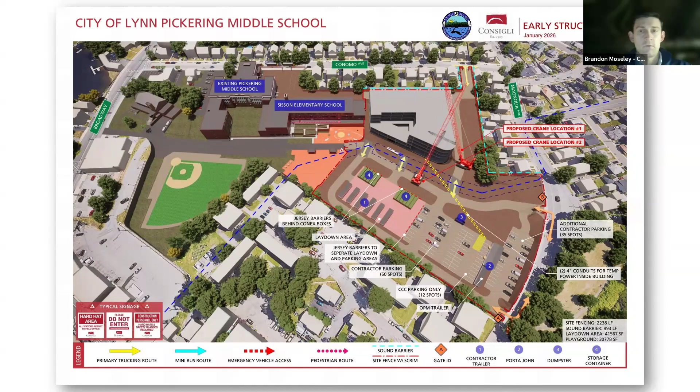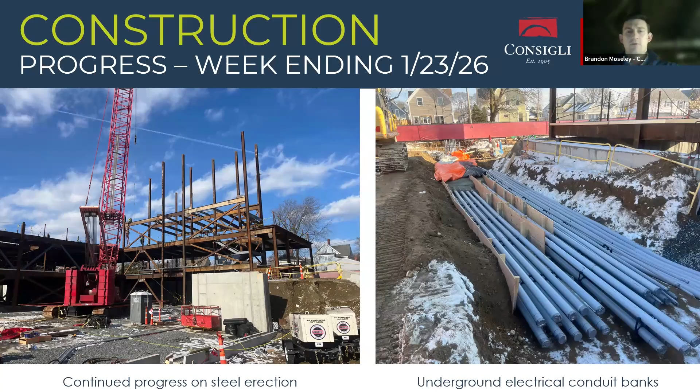On the right is a shot of our duct bank. While we've worked on the structure, we've continued with what we need to on the site. This was showing some of the secondaries coming in from that transformer location towards the building, and it actually takes another sweep through the foundation wall and into the area right beneath our electrical room to tie into all that equipment. There's another photo showing that progress further, but we've since been able to place that concrete, which is great.

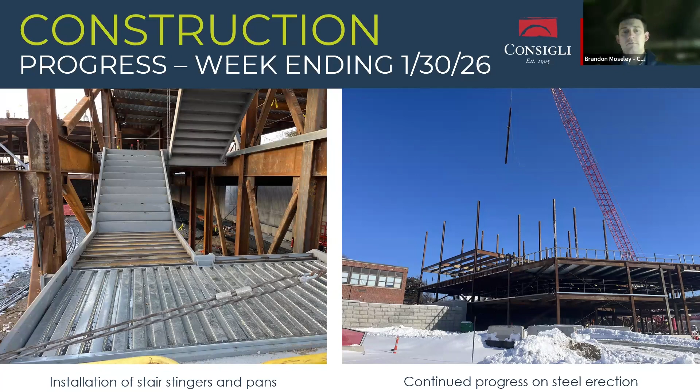The shot on the left here is the stairs that have been going in. A strategy Consigli uses as a whole when we can is to get the stairs in with our structural steel. It provides a much safer means of access for everyone working from now on. We're going to temp in these stairs with handrails, make them safe, and that will always be safe permanent access, nothing temporary goes in. So it's a budget plus as well as a safety plus for everyone on the site. On the right is a continued shot of the steel erection, a column being flown up onto the fourth floor, more towards the northwest side of that site.

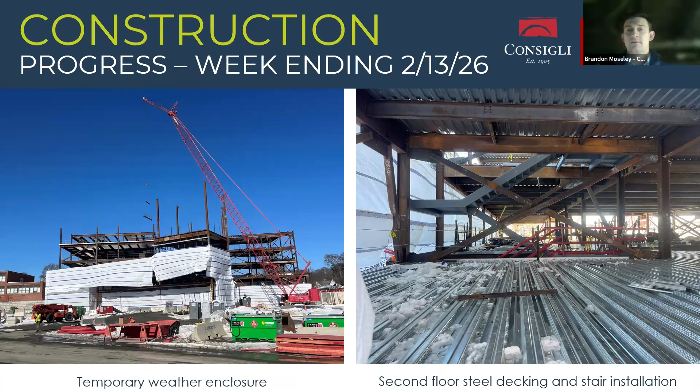So we're going to talk about some key milestone dates, but we're working right up against our goal of hitting our first slab placement, which is great, a little ahead of our milestone date. On the right here is a look of the level 2 slab. See some of the snow we've battled, as everyone else has here, right?

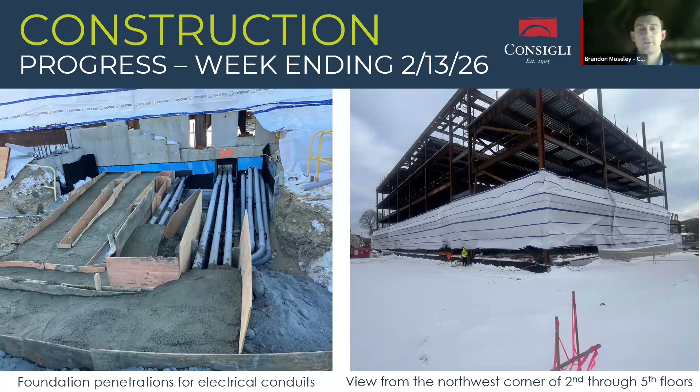But like I said, we've since been able to progress through that and even do some concrete placements to get that closer to being done. On the right is a shot from the northwest corner, just kind of showing that elevation progress of the structural steel, and then the tarping that's been tightened up on that corner as well.

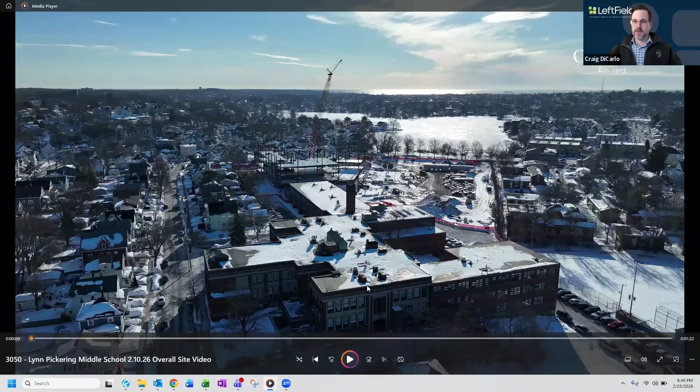All right, does everyone have that video up? Looks like it. Yes. So this is kind of flying in from the west side of the site towards the school. This was done the week of 2/10.

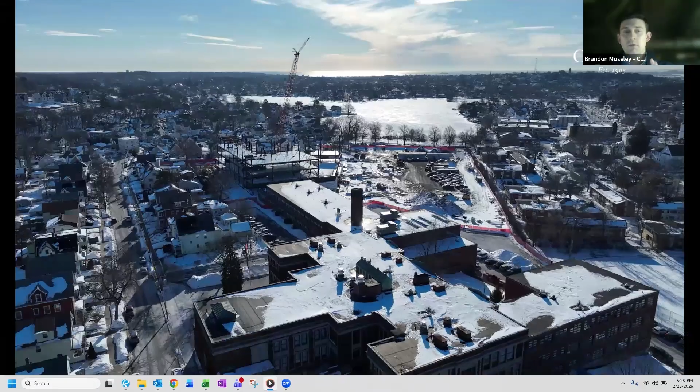So even now, if you're driving past locally, there's been progress since this was really made. You can see some big differences in real life, but you can see we've gone through levels 2, 3, 4, and are about to hit level 5 or 6, which is the roof, in this video. So you really kind of get the breadth of what we've been able to do.

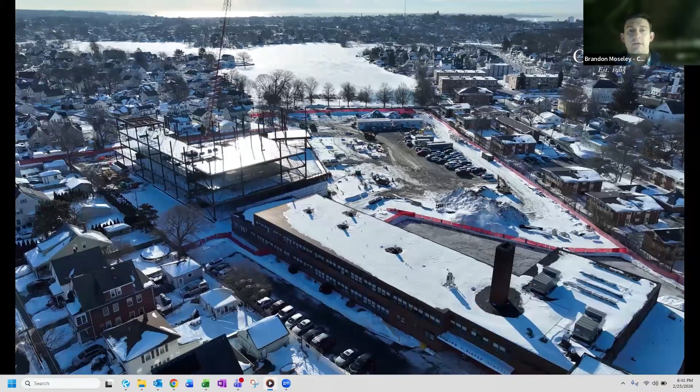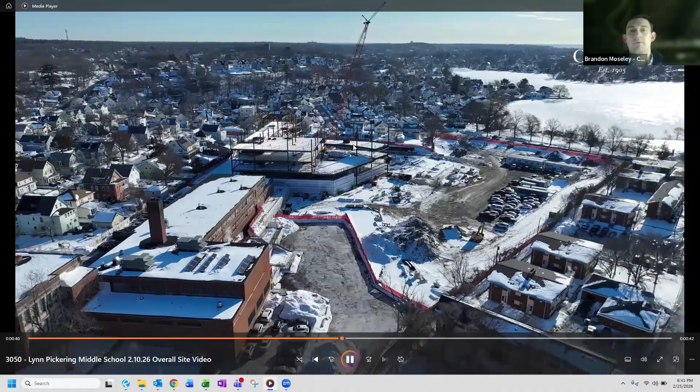And this is a pan out kind of from the southwest corner, showing a little bit of a different angle. You can see that roof deck, which is in the middle with some snow on it here, but you could see that opening for the future skylight. So we're making some great progress.

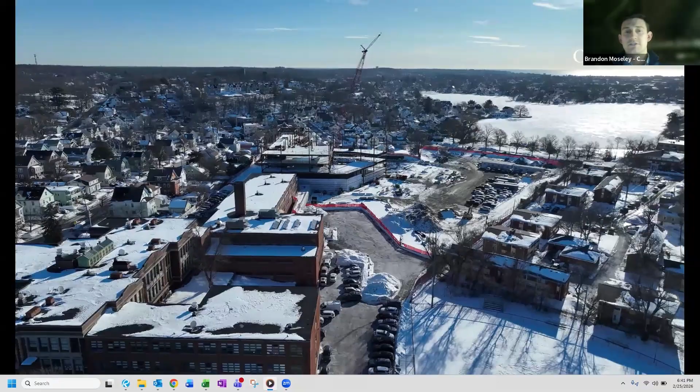This is, again, the crane in position 1. It's since moved, which allows us to keep going. We got some big deliveries today of some large pieces of steel as we start to tackle the area above what's going to be the gym. So you'll see some big pieces come in and go up over the next couple of weeks to really form that southeast corner of the building.

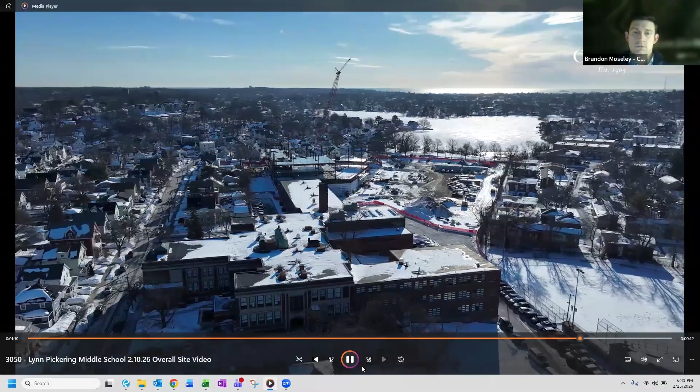All right. Before I jump off of this, any questions about any of the photos we shared or video? Fantastic. Oh, Lorraine, I see your hand.

I just haven't, I've been having little nightmares about the height because when I see it, when I look up and see how huge this building is, and I think of kids on the fifth, fourth, and third floor, where can you show me where the exits are going to be on that Sisson parking lot?

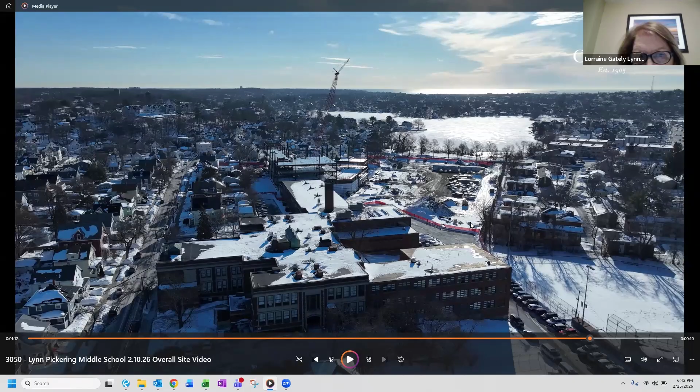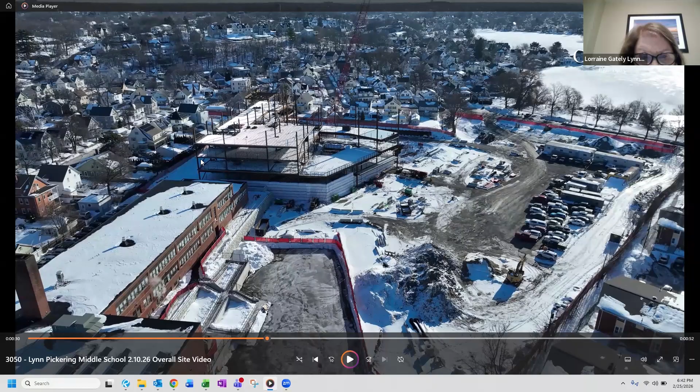So it's going to be a little tough. I'm sorry, so the main entry is going to be over here. Yep, I got that. There's an exit on the north side, I believe. And then there's also a stair. Unfortunately, I don't have a view of it with this drone video, but on the east side, on the back side of the building. So there's a handful of exits at different elevations that I know RDA's, I don't think I saw them, but they'd be able to speak more to why things were selected and how they're planning for folks to get out of the building from a code perspective. But there are multiple ways to egress, Lorraine.

Okay, and there was one other thing I wanted to ask you.

I got an email today that there was a problem at Sisson. So for the rest of the group, we want to give you that info and update. Some teachers notified the city, who then called us immediately on the project team that there were some odors in the school.

That happened early this morning. So our team went over and investigated with LeftField to try and see what the source was, if there was a cause from our site.

We have a whole bunch of CO monitors set up in our construction site that protects our workers, tracking any gases that could happen, which is especially important with the building being tarped in. But our staff also wears a personal CO monitor, so they went through the entire building wearing that to make sure there was no gases we had to be worried about because of those comments about some sort of fumes that were happening.

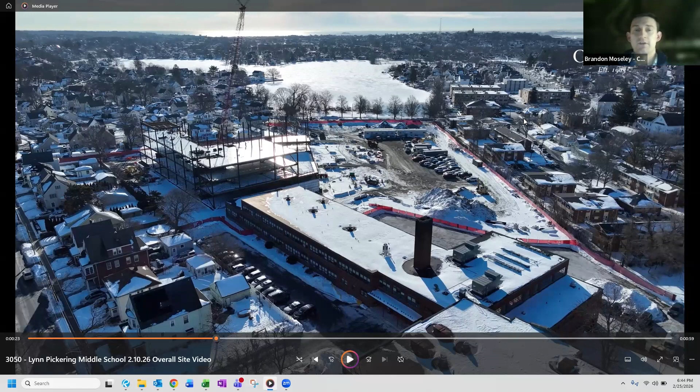We'll be taking a look and see if that heater was really the source, and if there's anything we got to do to address that, we certainly will as a group. But we pulled that immediately out in case it is, and everyone will have their eyes on this as we continue forward. Thank you. You're welcome.

All right, Craig, if you want to take back over. Yep. So just a couple real high level milestones. We've been talking about the structural steel.

The first piece went in December 23rd, and Consigli is still tracking towards finishing the steel, at least the crane leaving the site. So major pieces being up by April 2026, and then there'll be a couple months of detailing and finishing that structure up.

Concrete is another big milestone, so the second floor slab on deck is going to be the first concrete being placed, and that's trending towards mid-March, maybe even a little bit earlier. That's looking very hopeful, but of course weather dependent, and we all know that's been a little bit crazy recently.

Another big step is the under slab utilities down at the first floor. Those began yesterday or maybe today with the plumbing subcontractor coming on, and that's anticipated to complete mid to late April 2026.

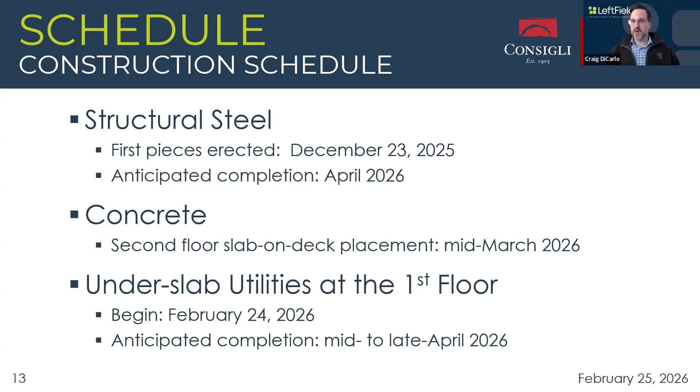Here we are on the overall schedule, towards the end of February, and we see that we're still in the first, let's say, quarter of the main school's construction, maybe even fifth, but chugging along, moving along. As Brandon was saying, things are going at a nice clip now.

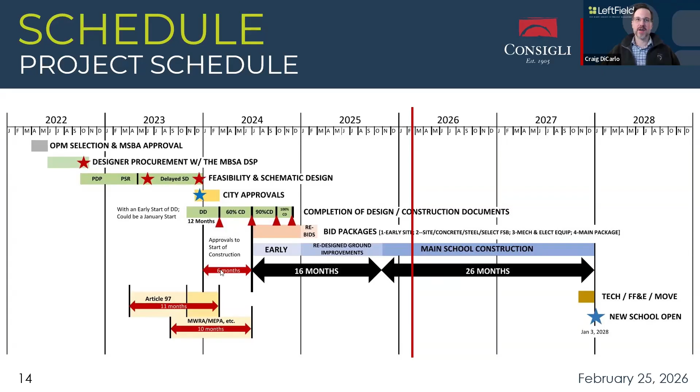Any questions about the schedule or construction schedule or milestones before we continue on?

Great. So upcoming meetings. Our next regular SBC meeting is going to be March 18th. But then a special event is being planned for Thursday the 20th - that's a steel topping off ceremony.

A little bit more about that, just to give everyone a flavor. Many of you may have attended steel topping off ceremonies in the past, but if you haven't, it is a big milestone for the project. We did the groundbreaking ceremony over here off the property, and that was open to the public. It was great.

This steel topping off, in order to do all of the parts of the ceremony, we're actually going to be on a live construction site. And so for that reason, instead of being open to the public, this event is going to be by invite only. And of course, everyone on the building committee is invited, city council, school committee, a bunch of others, MSBA.

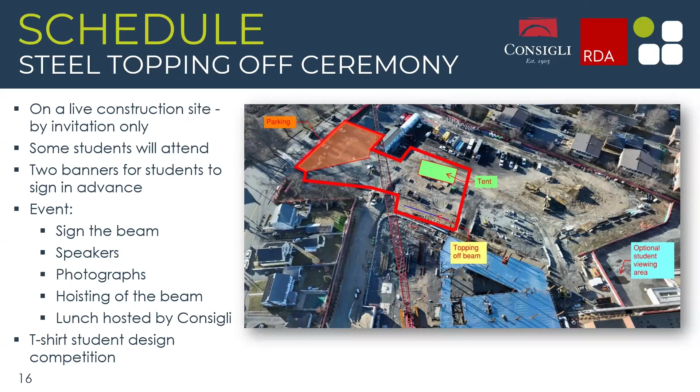Another exciting thing that happened was Lynn Voc Tech Institute sent a group of their metal fabrication students over to the site, back on January 20th. Brandon, you want to talk a little bit about this event? I wasn't there.

Yeah, we had another great site visit with the students. We got a chance to look at some of the erection that was happening at the time, got a little up close with some of the decking and detailing they were doing. One of the great things we had the ability to do was bring in the owner of Boss Steel, who actually has a background going to a vocational school, becoming an iron worker, then opening up his own company. So he gave the kids 45 minutes to ask whatever questions they had, whether about career, school, or different things about the union. So we had another great visit.

Our next one we're planning will be with the carpentry students again. When we get a little further along with some exterior framing, they can see the next step since they've seen the concrete forming side of it. Now they'll get to see another scope of work they could have a hand on in the future. So it was another good one. That's great, yeah.

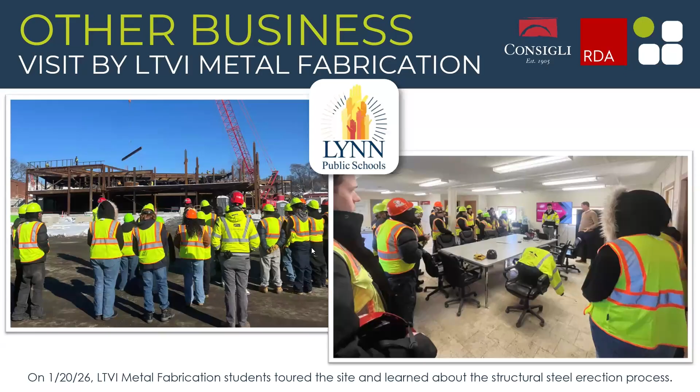Another interesting update, hopefully. So many moons ago, there was discussion about a time capsule, and Flory, thank you, you brought it up again last month, and that was our catalyst to get things moving again. So in coordination with the school...

We're honing in on a plan, and the design team proposed a couple locations. The school selected this one right here, which is tough to tell where it is, but it's in the main lobby. The learning stair is this handrail, or guardrail, that you see going up, and it's in this section of wall beneath the learning stair. So it's very visible, and there's this nice cavity or void behind the wall, so we're not taking away space from any of the actual rooms.

So we've got a location. This is a product that was used on a recent project, a stainless steel time capsule box, which will get mounted in the wall behind a little panel door. The school has identified a group of students, the Leadership Club, who will research and decide what they want to put in that capsule, which is actually the fun part. There's a teacher, Mr. Green, who's going to facilitate that. They've got from now until basically summer 2027, so just over a year to plan this out and make it an educational experience.

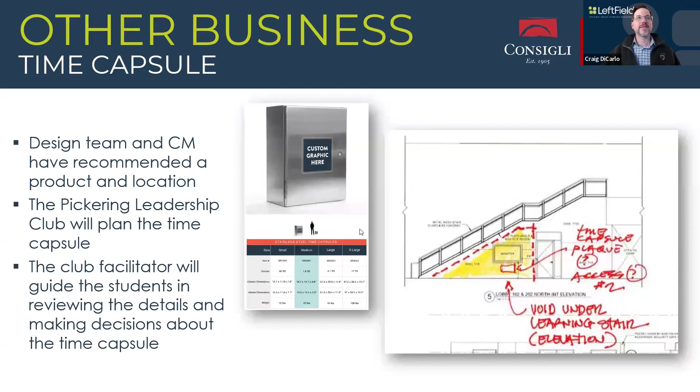Any questions about that? Nope, thank you. I did have a question for Brandon - was this project bought out with a mockup in mind for the facade? I think I've asked this before. Yeah, I think we've talked about that, Flory. There's no dedicated, separate, standalone mockup specified.

We will be doing first installs, and we have a whole window testing QA/QC program, and we do a lot of quality pre-ops, meetings, and trade meetings. So it's still a ton of attention - it's a priority to make it go in and go in right and function. So we will still have that assurance, but we do not have a standalone mock-up in the documents here.

Okay, thank you. And where are we with finishes, the whole process, Craig? So everything's been selected. We've gone through and done the submittals for everything, now that we know what those are all going to be. So those are all in the different levels of basically being procured. We should be in great shape for when we need them on site.

And are all the conversations being tracked on Procore or just email based? I hope not - all our submittals, all our documentation goes through Procore. Okay, alright, thank you.

And Flory, somewhat recently - I want to say it was maybe the December meeting or maybe even the November meeting - Gene gave a presentation. I'm not sure if you were there for that, but I can send you a link to the actual presentation, and of course it also shows up on the website. For some reason I thought that was just partial, some interior finishes during that meeting. I think it was sort of like the clusters, the color palette. You got it, you got it. Right, and so then the design team, getting the agreement or confirmation from the building committee, then they've taken those colors, and then as they're selecting all of the specific materials like the tile and the paint, they're using that as their guide. Okay, alright, all good, thank you.